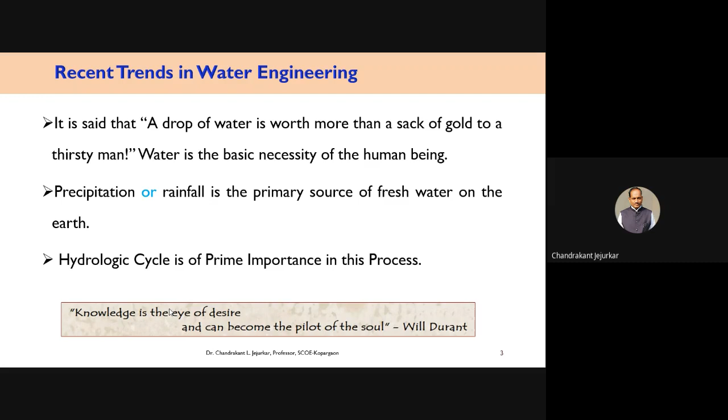Here I have shown one quote: knowledge is the eye of desire and can become the pilot of the soul, stated by Will Durant. I intentionally quoted this because whenever delegates attend this type of FDPs or STTPs, their thirst is to search for a problem for their research work. So knowledge is the eye of desire—if you have the knowledge, you will have the desire to become the pilot of the soul, meaning things may click to you, so that you get a problem statement or a research problem to work on.

Now coming to the concept of infiltration. Infiltration is the process of water entry from surface sources such as rainfall, snow melt, or irrigation into the soil surface. It is the downward movement of water into the earth's crust.

And definitely it starts from the hydrologic cycle. In most lecture sessions, touch is given to the hydrologic cycle because it is the major source of water, due to which there will be precipitation. So here also I will be talking about hydrologic cycle. In the first session itself, Dr. Dai has explained regarding this hydrologic cycle, and even touched briefly on infiltration. Till then, I would like to talk about this hydrologic cycle.

So here, the hydrologic cycle always begins from the oceans or surfaces of various types of ponds or reservoirs, or collection tanks. There will be evaporation, transpiration from trees, and it will go higher and higher. There will be condensation, formation of clouds, and after bursting of the cloud, there will be precipitation.

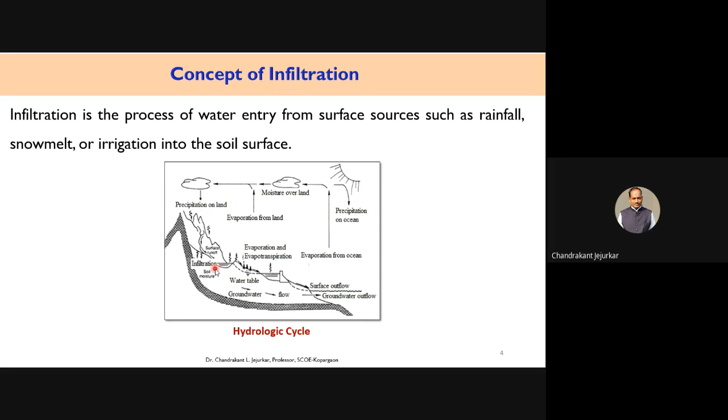Some of the part will become base flow also, and again this cycle will get continued. So in this presentation, we'll be talking about infiltration in detail.

So this is the flow diagram of the catchment already discussed. Along with the hydrologic cycle, precipitation will be there. After this precipitation, there will be interception, then stream flow, surface storage will be there. Out of this surface storage, some part will become soil water storage. It may go to vegetation, transpiration may occur, and then from this surface storage, there will be infiltration.

Afterward, there will be surface flow, then soil water storage, and due to this soil water storage, there is development of through flow. When it reaches a greater depth, it is called percolation. So infiltration occurs within the crust of the earth, and when it shifts to a greater depth, when it becomes part of groundwater storage, it is called percolation.

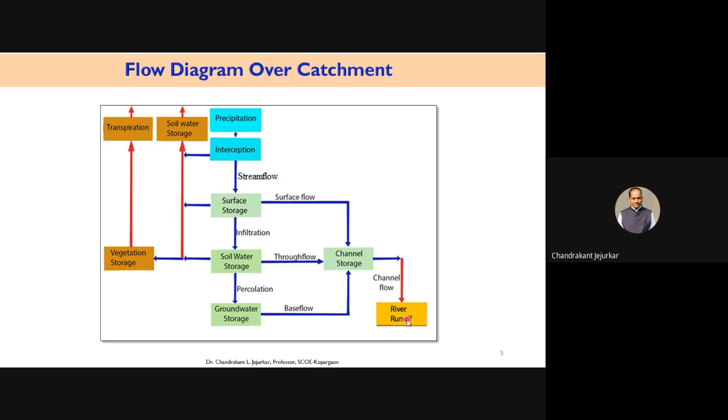Out of this groundwater, sometimes the base flow may intercept the ground surface at any place, and again it will become part of runoff, in turn river runoff.

Now, this infiltration concept was first developed by Robert E. Horton, an American geologist. While studying, or observing the soaking of water into the soil, he put forth the concept of infiltration first in 1933.

So already I had discussed regarding this percolation. Now, necessity of infiltration study - why study infiltration at all? Soil can be an exceptional medium of temporary storage of water depending on the soil type and its condition. The infiltration characteristics play an important role in the planning, designing and management of various hydraulic projects.

Infiltration study may help for watershed management. It is also useful for soil erosion control, for proper irrigation planning. Runoff prediction plays a vital role in water resources projects, and the accurate estimation of runoff is related with infiltration. So infiltration is very important.

So at a glance, it seems to be a very small thing, but infiltration has appealed to many hydrologists, and nowadays many hydrologists are working on this infiltration in one way or another. This infiltration is the cause for temporary storage of water into the earth.

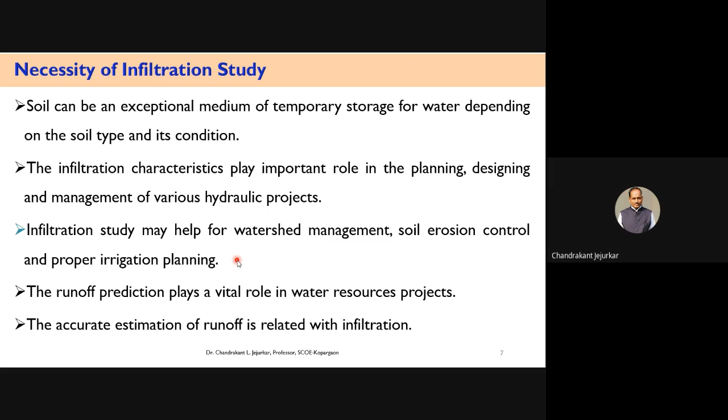So from this hydrology point of view, the study of infiltration, in turn runoff, is very important. It is also useful in watershed management, as rightly explained by Dr. Dai while discussing water hydrology. It is useful for erosion study as well as irrigation planning, because from infiltration one gets an idea regarding the depth of irrigation, so we can plan the irrigation scheduling also. That's why we have to study this infiltration.

Moving forward, objectives of the study: to evaluate the infiltration capacity of soil and reliability of infiltration test using double ring infiltrometer. Friends, for your kind information, since the last decade I am working on this infiltration, and till date I have observed more than 500 observations in the field.

I am not using anyone's data, my data is self-generated. So here I am stating the objectives, considering today's presentation: to evaluate the infiltration capacity of the soil and reliability of infiltration test using double ring infiltrometer; to study the validity of Kostiakov and modified Kostiakov infiltration models under existing land cover conditions; to evaluate the infiltration model parameters of Kostiakov and modified Kostiakov using field data; to employ artificial neural network to determine Kostiakov model parameters; and to compare field measured cumulative infiltration with model estimated and ANN predicted values.

So if you look into these objectives of the study, my first objective is to evaluate the infiltration test in the field. I have to carry out the field test, and then from this test determine the Kostiakov and modified Kostiakov infiltration model parameters, evaluate the infiltration model parameters, and employ artificial neural network. So the work is carried out in 3 stages. Two technical terms I would like to explain here.

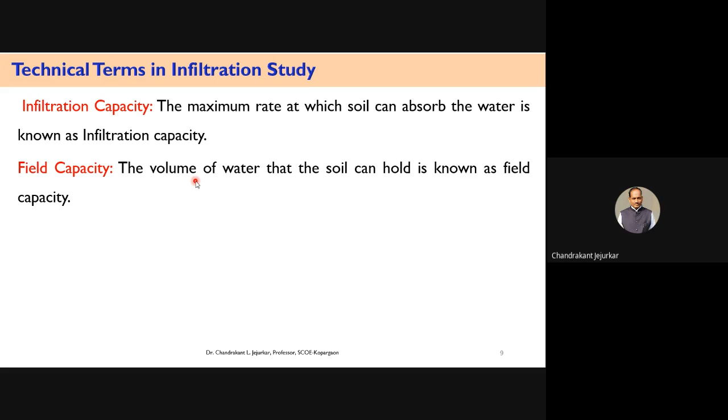Infiltration capacity: the maximum rate at which soil can absorb water is known as infiltration capacity. Field capacity: the volume of water that the soil can hold is known as field capacity. So infiltration capacity is the rate by which water is absorbed by the soil, and it is the maximum rate. Field capacity is how much water the soil can hold. So field capacity is related to volume, and infiltration capacity is related to rate.

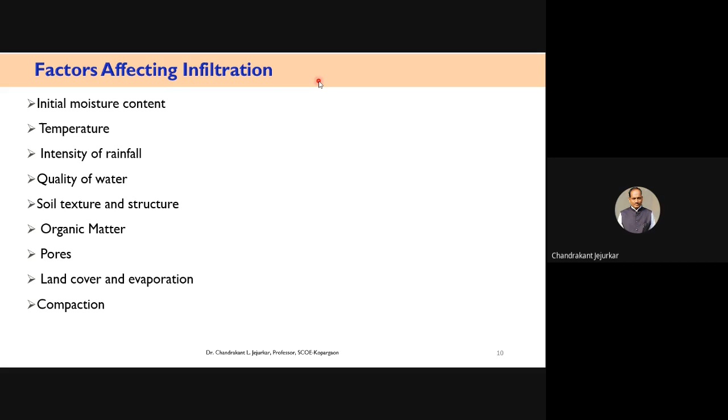Moving forward, factors affecting infiltration. While studying infiltration, one should know the various factors which may affect it, so we can come to an accurate estimation of infiltration, and in turn runoff. Unless we correlate all these parameters, we cannot have an accurate estimation. The first factors are initial moisture content, temperature, intensity of rainfall, quality of water, soil texture and structure, organic matter, pores, land cover, and compaction. These are a few parameters stated here; I shall explain a few of them.

Initial moisture content: the initial rate of infiltration depends on the initial moisture condition of the soil. When soil moisture is high, infiltration rate is low, and when soil moisture is low, infiltration rate is high. So if soil is holding sufficient moisture initially, the thirst will be less, so infiltration rate will be slow. And if soil moisture is low, infiltration rate will be high.

Temperature: viscosity of water changes with temperature. Increase in temperature causes reduction in viscosity, so infiltration is higher when temperature is high. It is directly proportional - if temperature is high, infiltration rate will be higher because the water absorption capacity of the soil will be more in that case.

Then coming to intensity of rainfall: high intensity rainfall causes mechanical compaction of soil, so heavy intensity rainfall causes less infiltration, while lesser intensity rainfall causes higher infiltration. This intensity of rainfall is also very, very important. So if we observe, when heavy precipitation occurs, there will be early development of runoff.

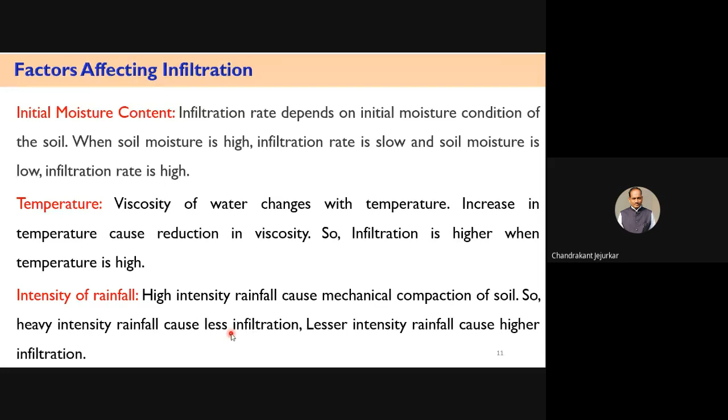Moving forward, quality of water. The quality of water is also very important. If the water is of good quality, potable and clean, infiltration rate will be more. If it is containing organic matter, silts and other impurities, it will reduce the infiltration rate. In case of muddy water also, infiltration rate will be less as it contains small colloidal particles, which reduce the infiltration rate.

Compaction also has a major effect on infiltration rate, as we are talking about the farm. In farming, there is movement of men and animals required in the field. Due to this movement, there will be compaction of the soil. If we try to determine the infiltration rate in that area, obviously the infiltration rate will be very, very less.

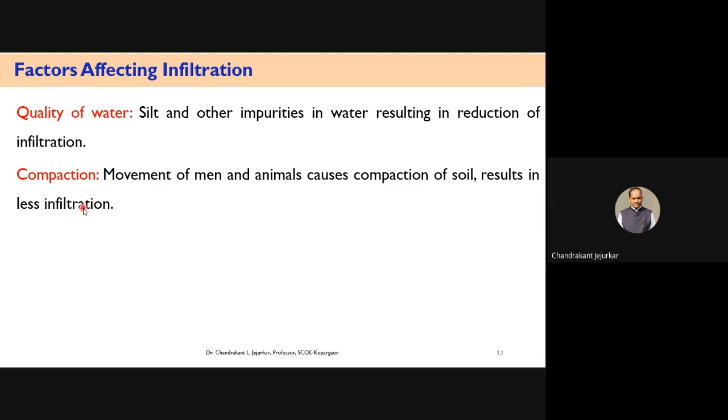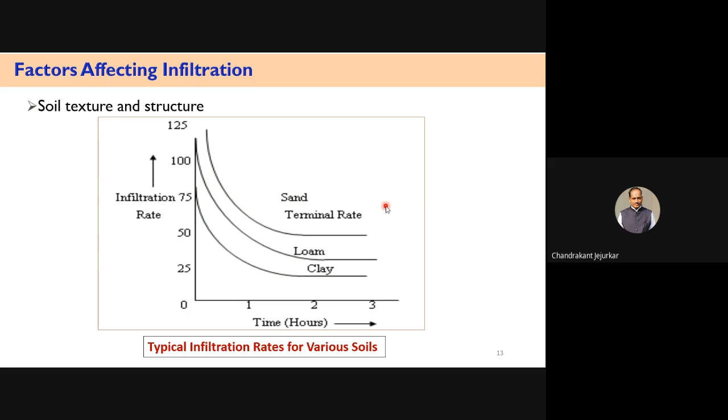Structure is also very important. In case of a square textured soil, infiltration rate will be more. In case of rhombic structure, particles will be more compacted, so infiltration rate will be less. Around round particles, more space will be there, higher porosity and more infiltration. In case of angular particles, there is less pore space, less porosity, and less infiltration.

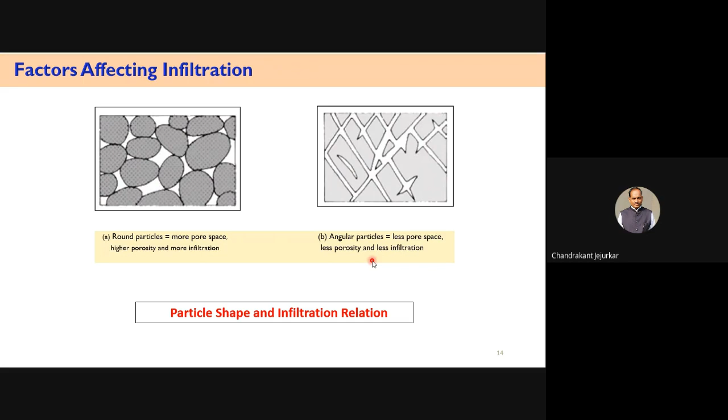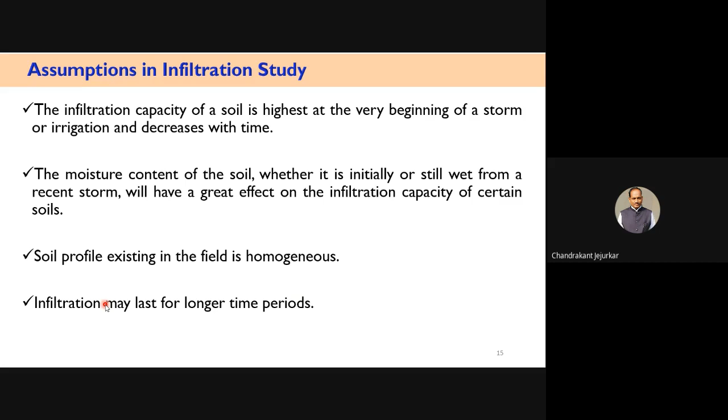In any research, assumptions are always there, and similarly there are some assumptions in infiltration study. The infiltration capacity of soil is highest at the very beginning of a storm or irrigation and decreases with time. The moisture content of the soil, whether initially dry or still wet from a recent storm, will have a great effect on the infiltration capacity of certain soils. The soil profile existing in the field is treated as homogeneous. Infiltration may last for longer time periods. This assumption is important, because within 2 to 3 hours we cannot get the result of infiltration, but during my observations it takes couple of hours to become constant, as we have to stop observations when infiltration rate becomes constant. How it becomes constant and where to stop, we shall discuss while discussing the observation table in detail.

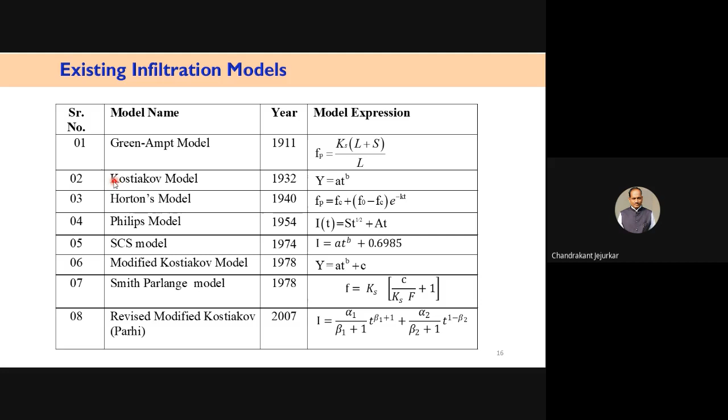Now, these are the existing infiltration models: first is Green-Ampt model, then Kostiakov model, Horton's model, Philip's model, SCS model, modified Kostiakov model, Smith-Parlange model, and revised modified Kostiakov model. Out of these models, I had worked on the Kostiakov model, the modified Kostiakov model, as well as the Horton model.

Coming to the study area, since last decade I am working in the Kopargaon region. This case study which I am presenting in today's presentation is related to the village Brahmangaon, which comes under Kopargaon Taluka.

In case of the study area, the temperature variation is 20 degrees centigrade to 40 degrees centigrade, minimum 20 degree, maximum 40 degrees centigrade, and average annual rainfall observed is about 480 mm, because it comes under a rain shadow zone, so this amount is not predominant.

Most of the part of Kopargaon is underlain by basalt. In this complete Ahmednagar district, basalt is predominant.

Soil in the investigation area is a clay soil. Locally this soil is called black cotton soil. In Maharashtra also, the clay soil is called black cotton soil. This is also called a deep soil.

In case of this Kopargaon region, the depth of this clay soil is 25 to 30 feet, around 25 feet. It is a deep soil.

As per Food and Agriculture Organization FAO and USDA taxonomy, this type of soil comes under vertisols.

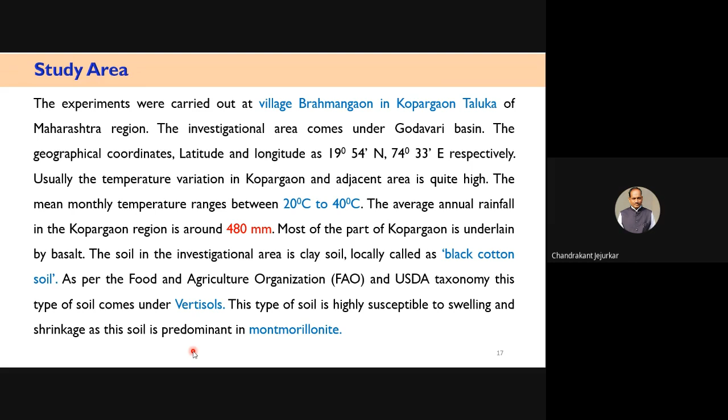This type of soil is highly susceptible to swelling and shrinkage as it is predominant in Montmorillonite. In case of this vertisol, the major difficulty is that when it dries, it shrinks a lot, and when it comes in contact with water, it becomes moist and swells. The reason is that it is predominant of Montmorillonite element.

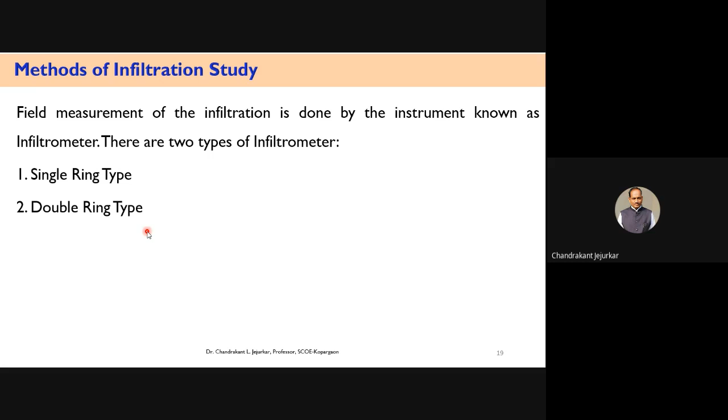Now, methods of infiltration study, how to determine the infiltration in the field. In the field, different techniques are there for determination of the infiltration rate. Mainly there are two types of infiltrometer: single ring infiltrometer and double ring infiltrometer, used for determination of infiltration in the field.

Coming to this single ring infiltrometer, as its name suggests, it consists of only one ring, called a single ring. The diameter of this single ring is 30 centimeter and depth is 25 centimeter. This is used for determination of infiltration in the field.

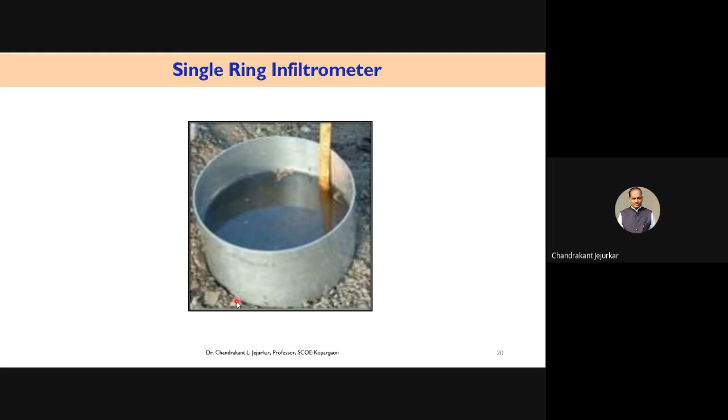How it is determined, we shall discuss while discussing the double ring infiltrometer. The difficulty with the single ring is that normally it is not used for determination of infiltration in the field, because there is a possibility of lateral flow, lateral movement of water. As per our definition, infiltration is the downward movement of water, so in case of the single ring there is a possibility of lateral movement also. So for accurate estimation of infiltration, single ring infiltrometer is not preferred.

Now coming to the double ring infiltrometer. It consists of two concentric rings, this is the inner ring and this is the outer ring. Most of the time this double ring infiltrometer is used for determination of infiltration in the field. The inner diameter of the inner ring is 30 centimeter, depth is 25 centimeter. The diameter of the outer ring is 60 centimeter and depth is 25 centimeter.

For determination of the infiltration in the field, these rings are installed in the field. How does this process work?

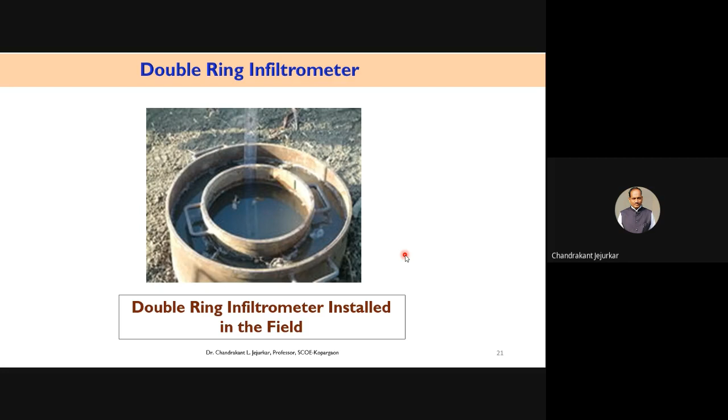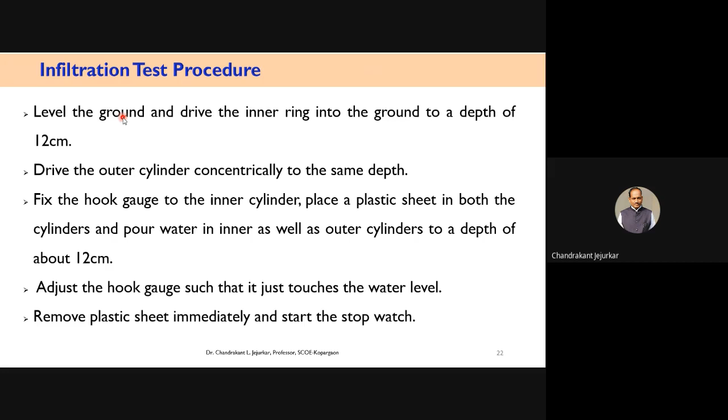Infiltration test procedure: first, level the ground and drive the inner ring into the ground to a depth of 12 centimeter. Leveling the ground means you should not use any tool that disturbs the natural condition or natural structure of the soil, so roughly with the hand, without any type of tools, one has to level the ground, and then insert this inner ring.

When I initially worked on this infiltration, before 10 years ago, I had fabricated this infiltrometer for my infiltration purpose, and recently I have purchased this double ring infiltrometer for my future study. Presently, I am working on this double ring infiltrometer.

First the ground is made approximately level, and then the inner ring is inserted into the ground with the help of a driving plate. This type of plate is used to drive the inner ring into the ground. First, the inner ring is properly placed where one has to take the observation, and then it is inserted into the ground to a depth of 10 to 12 centimeter with the help of the driving plate and hammer.

Driving plate will be kept here, and then it is hammered so that it gets inserted to a depth of 10 to 12 centimeters. Then the second ring, concentrically it is kept, this outer ring, and then with the help of this driving plate and hammer, it is inserted to the same level as the inner ring, driven concentrically to the same depth.

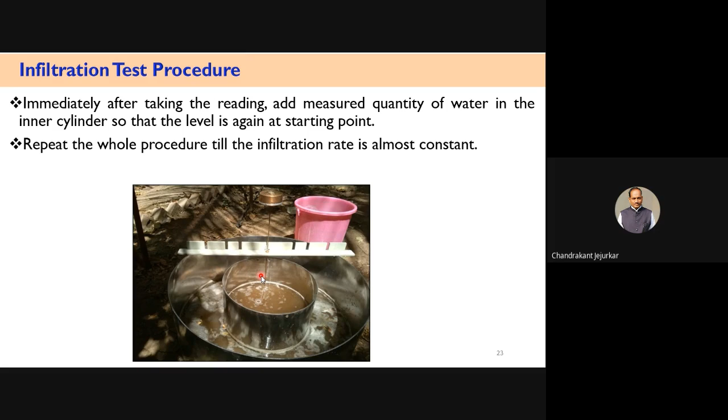When papers are removed, initially the water surface, this point is touching the water surface, then water will start penetrating. The time is recorded, observations are recorded as the gauge is adjusted. Then immediately after taking the reading, add a measured, sufficient quantity of water. It is measured and added so that the next level will again equal the initial level, meaning this pointer is touching the water surface. Now this complete process is repeated until the infiltration rate becomes constant, right?

Now, for my study till date, I have used the Kostiakov model, modified Kostiakov. I have also worked on the Horton model in my PG project itself.

So the expression for this Kostiakov model is y equals, or sometimes y suffix c is used, y suffix c equals a into t to the power b. Here a and b are the model parameters, and these are the soil constants related to the soil.

Modified Kostiakov: y equals a t to the power b plus c, and here a, b and c are the constants, soil constants. C is normally called the decay constant.

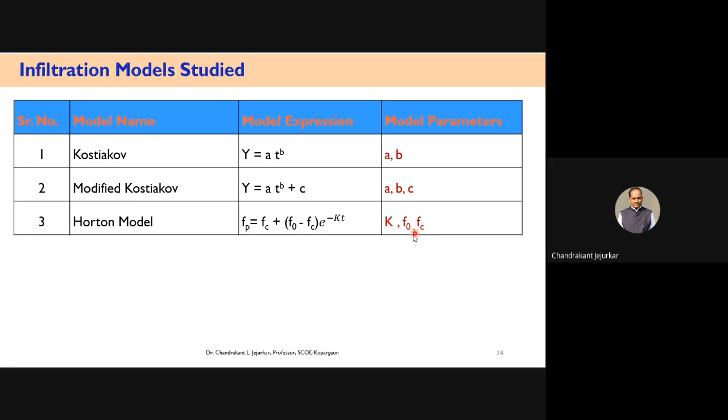In case of the Horton model, the expression is given as f suffix p equals f suffix c plus, in bracket, f0 minus f suffix c, close bracket, complete e to the power minus kt. Here K, F0, Fc are the constants which are required to be determined from the field data.

Coming to this Kostiakov infiltration model, the basic expression is given as y suffix c equals a into t to the power b. Here Yc is the cumulative infiltration, or you can say accumulated infiltration, always in terms of centimeter. T is the time in minutes, and A and B are the parameters.

For determination of A and B from the field data, different methods are used, analytical methods and graphical methods. For determination of these parameters A and B, I have mainly used the analytical method. If anybody is interested, there is a practical manual available in the WALMI, where the complete procedure is explained in detail for determination of these constants A and B.

This A and B can be determined by forming the equations. For that purpose, we have to convert this expression in terms of log y equals log A plus B log T, and then whatever observations we have got from the field for Yc and T are substituted here. Then we have to divide the equations into 50% groups, form two equations, and obtain A and B from the field data.

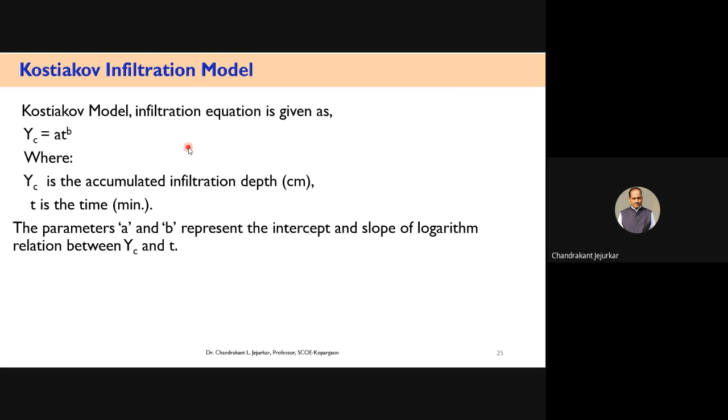Similarly, in case of the modified Kostiakov model, the equation is Yc equals A t to the power b plus c. Here A and B are determined similar to the Kostiakov model, and c is the soil decay constant, normally determined by the Davis method, which is also explained in that manual. If you are interested, you can get that manual and very easily determine it.

But for that purpose, we have to collect the field data. For determination of C, we have to plot log y versus T, and then select any two times T1, T2 and corresponding Yc values Y1, Y2, and then the constant can be determined.

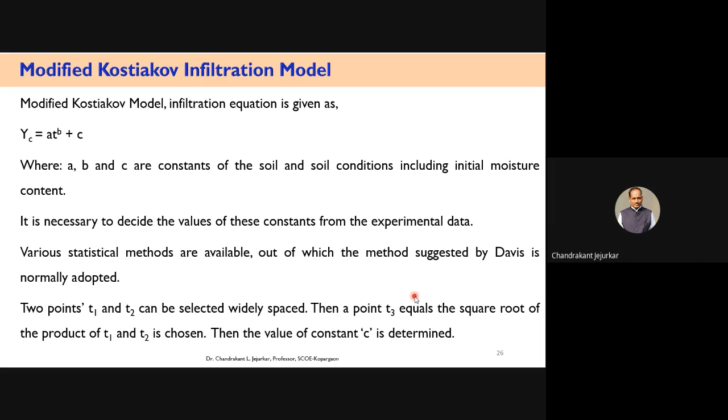So T3 is equal to the square root of T1 into T2, and then Y3 will correspond to this T3, and then we can determine this C. One more expression is there for determination of this C also.

While determining infiltration for accurate estimation, if you determine the infiltration in the field, you will get accurate estimation. But in addition, we should study various physical properties of the soil which may directly or indirectly affect the infiltration. So in this case study, I have studied moisture content, bulk density and dry density, mainly bulk density of the soil, particle size distribution, electrical conductivity, field capacity and permanent wilting point. These parameters I have studied in the field.

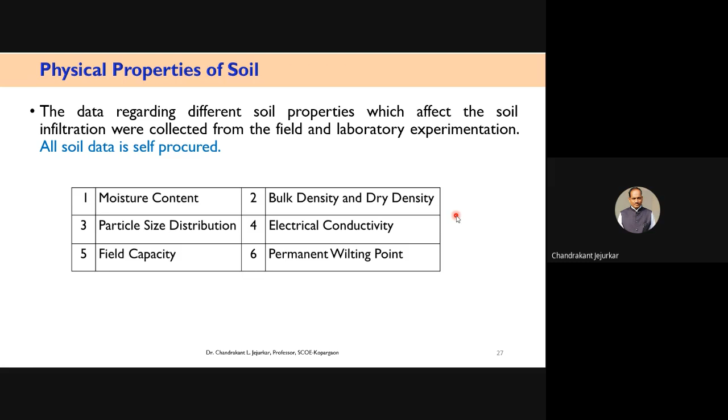So prior to starting the infiltration, we have to study these soil parameters, that is moisture content. We have to study bulk density also, because bulk density dictates the compaction of soil. Bulk density depends upon the compaction of the soil.

Pore spaces provide a more useful physical description of the soil, and soil bulk density is a measure of soil compaction as well as its strength. From this, we get an idea regarding the deviation in the infiltration. If it is less, if it is more, we have to study why it is there, or we can analyze it with the help of this bulk density of the soil.

Then particle size distribution, that is determined by the hydrometer method using Stokes' law, which is the basis for it.

Then electrical conductivity. This electrical conductivity tester I purchased at that time for testing electrical conductivity. This soil electrical conductivity is an indirect measurement that correlates very well with several soil properties and chemical properties. This electrical conductivity works on the cations and anions, and this is very, very important.

Electrical conductivity has been used to assess soil salinity. In case of finer particle soil, in case of clay soil, the electrical conductivity is high, and in case of sandy soil, the electrical conductivity is less. So this electrical conductivity obviously dictates upon the infiltration.

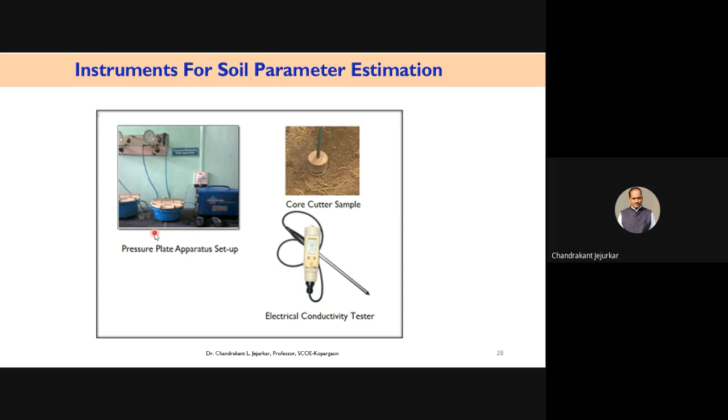The difference between field capacity and wilting point gives the depth of water to be applied. Field capacity is the upper limit, showing the upper limit of water in the soil after free drainage for 2 to 3 days, and wilting point is the lower limit. So the difference of these two gives an idea regarding the depth, which is useful for irrigation purpose, or to decide the irrigation scheduling also.

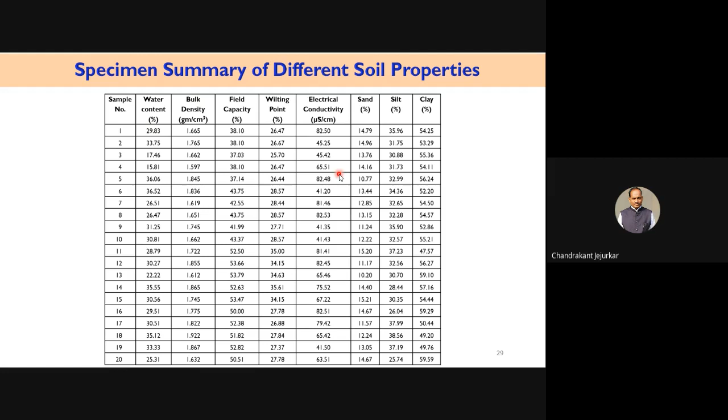As part of this case study, I had used 120 observations. Out of these 120 observations, some observations are outliers, meaning they don't give proper results. Those are removed, so 106 parameter details I have collected, and as a part of specimen, here only 20 observations are shown. Here you can see water content, bulk density, field capacity, wilting point, electrical conductivity, and then percentage of sand, silt, and clay.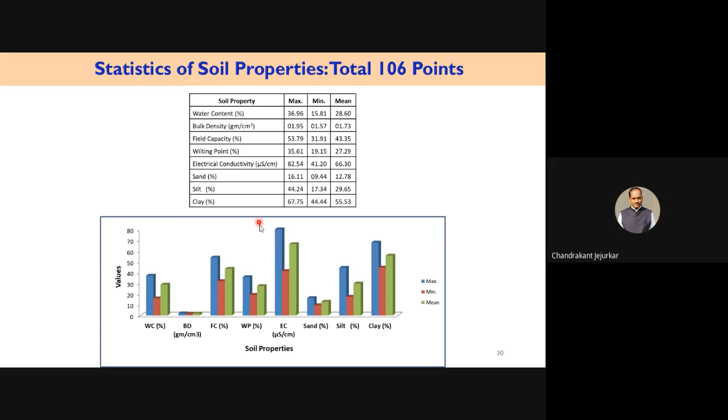Now coming to statistics of the soil parameters, already I have told you 106 point observations are there, total 106 points. Here you can see the maximum, minimum, and average values of all these parameters. These are also shown graphically.

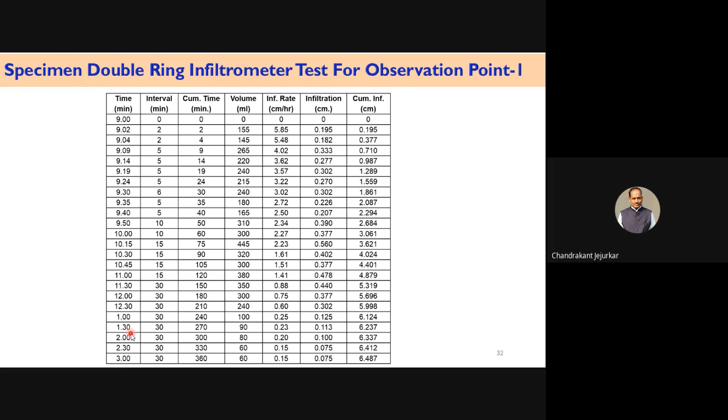At the same time, if continuous pores are there, sometimes even after 10 to 12 hours, we won't get the constant infiltration rate. In that case, the test will get failed, because we cannot continue for 24 hours also. So this is regarding the observation table.

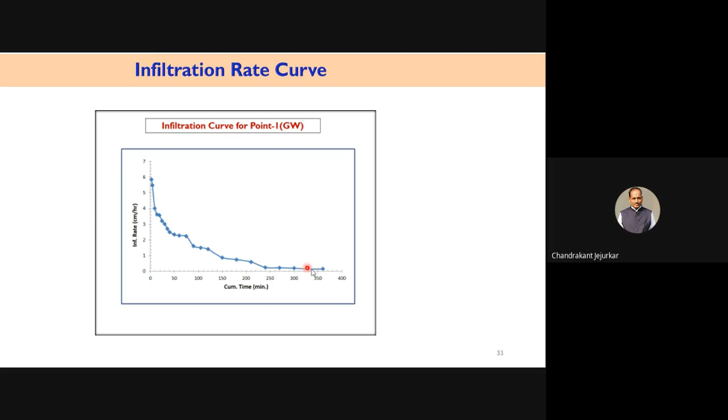Now with the help of the same observation table, here is the outcome. This is the plot of infiltration rate versus time, where infiltration rate is determined in centimeter per hour and time in minutes. Initially the infiltration rate is very high, afterwards it becomes less and less, and at the end it becomes constant. This is the nature of the infiltration rate curve.

So here again I had shown these two plots. This type of plot is similar to the previous one. This is the infiltration curve for point number 5, which is the Bajra crop, and this is the infiltration curve for point number 6, which is also a Bajra crop.

Here you can see initially the infiltration rate is high, then it is reducing and reducing. Afterwards it becomes constant, and this constant rate is also more than 5 centimeter per hour. So this is also high in case of Bajra crop.

Now for the same land cover, here you can see the infiltration rate becoming low and low. Again there is an increase, again afterwards it is decreasing, again increasing and then decreasing. Sometimes in the field this type of situation may arise due to continuous pores, bigger pores, or bigger voids. In that case the infiltration rate will suddenly become high, and this type of formation will be there.

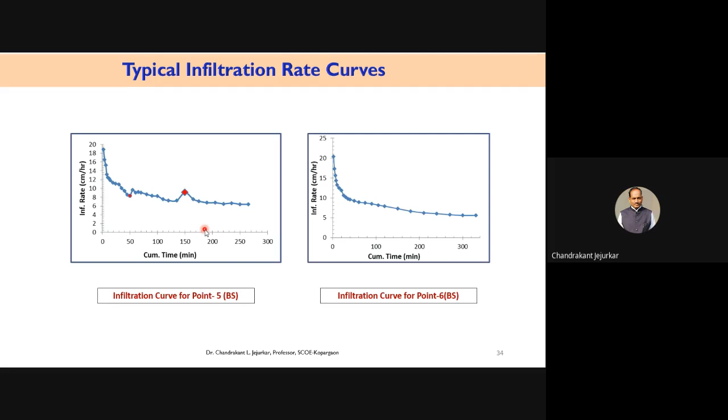Technically this is called neck formation. You will find this type of neck formation during observations also. In that case one should not get disturbed or disappointed about what is happening. No, it is the nature of it. Still we have to continue the observations in the field. If this type of situation is there, sometimes it becomes very difficult to adjust the amount of water also. These are field problems sometimes.

Coming to average cumulative infiltration depth, the total amount of water infiltrated, again for grapes in summer it is 4.35, which is the lowest. For the rest of the crops and land covers it is more. Here if you observe for sugarcane, normally we say that a large amount of water is required, and the same has been proved practically. The cumulative depth of infiltration is around 46 centimeter in case of sugarcane, and nearer to this, gram is there, and then bajra. For gram and bajra also, the cumulative depths are more.

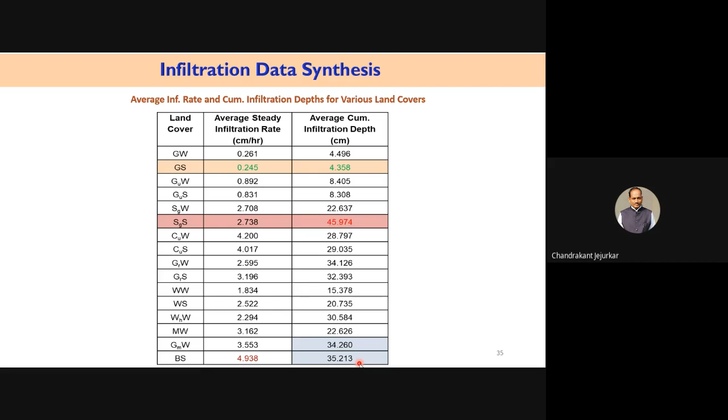There is a reason. Now you may think that normally for gram less amount of water is required. Yes, for bajra also less amount of water is required. Normally in case of gram, those belonging to farmer families might be aware that a maximum of 2 waterings are given, or sometimes only 1 watering is given to the crop. In case of bajra also, 2 to 3 waterings are given. So when we try to determine the infiltration rate in case of gram, as the soil will be very dry, and in case of black cotton soil there will be contraction of the soils and development of cracks, due to this the infiltration rate will also be more, and cumulative infiltration depth will be more. That is the reason.

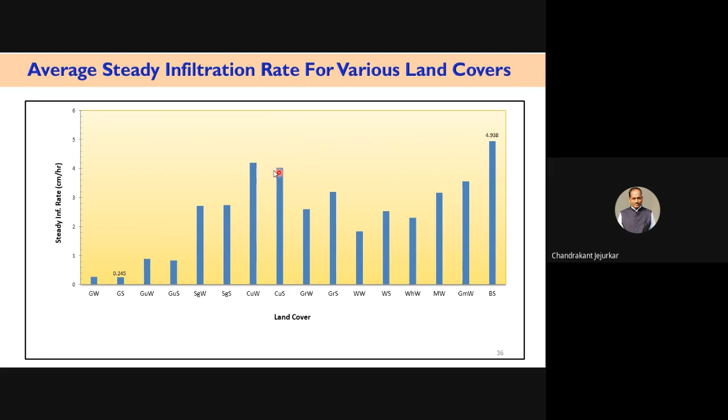So graphically the same thing is shown. This is the lowest value for steady infiltration rate, and this is the highest value for steady infiltration rate. This is predominant with the help of the graph, that's why I have shown it graphically also. Coming to cumulative infiltration depths, in case of sugarcane it is the highest. For gram as well as bajra, it is also high.

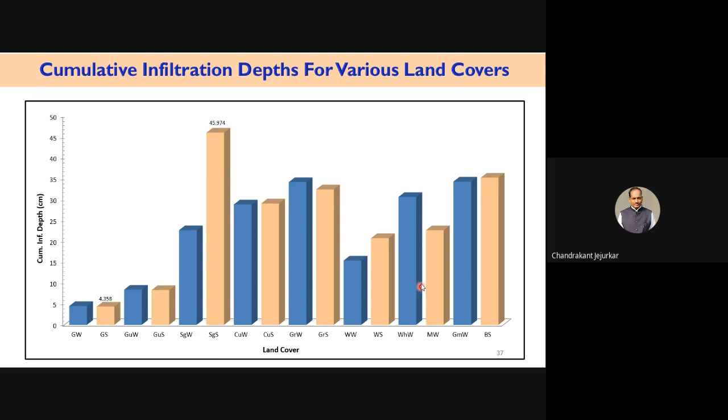Then computation of model constant. After observing the infiltration rate in the field, after determination of steady infiltration rate, after determination of cumulative depth of infiltration, I have determined Kostiakov model constants as well as modified Kostiakov model constants for various crop covers. For a same soil, but as crop covers are different, there will be different constants and different equations. This type of equations one can develop from the field observed data.

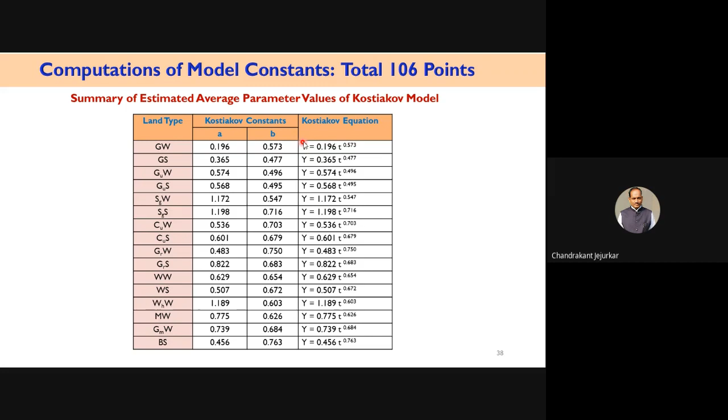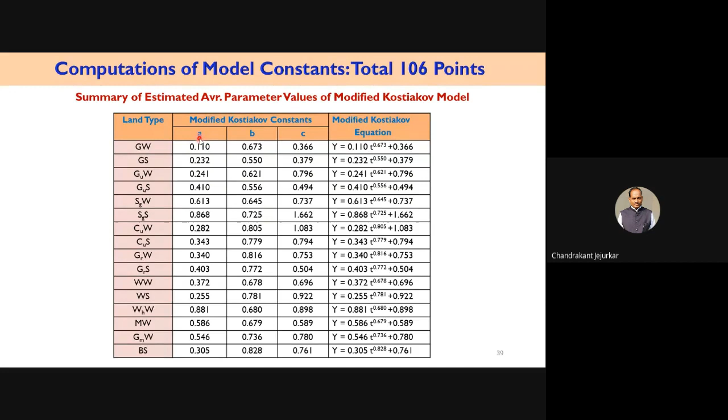And then we can find out the cumulative infiltration as well as infiltration rate by substituting the time. At any time interval, we can have infiltration rate and cumulative infiltration with the help of such an infiltration equation. This is the observation table for modified Kostiakov constant. A, B, and C already determined, and these are the equations for different types of land covers.

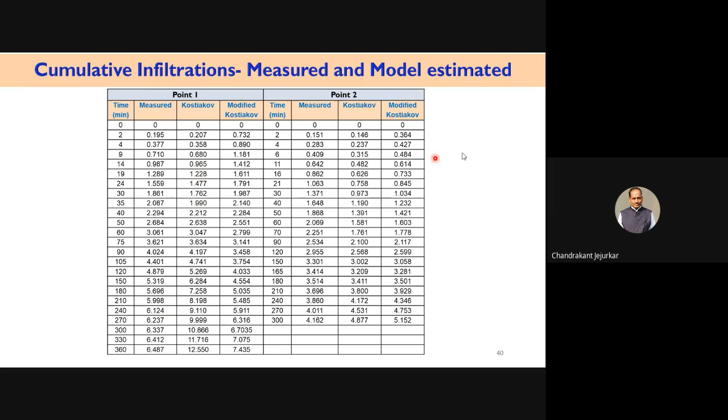Then here, cumulative infiltration measured and model estimated comparison is shown for observation point number 1 and point number 2. So for two observations, that is sample, it is shown here. So if we look into this measured value, then this is by Kostiakov model and this is by modified Kostiakov. These are the cumulative infiltration values. Same thing I have plotted with the help of a graph also.

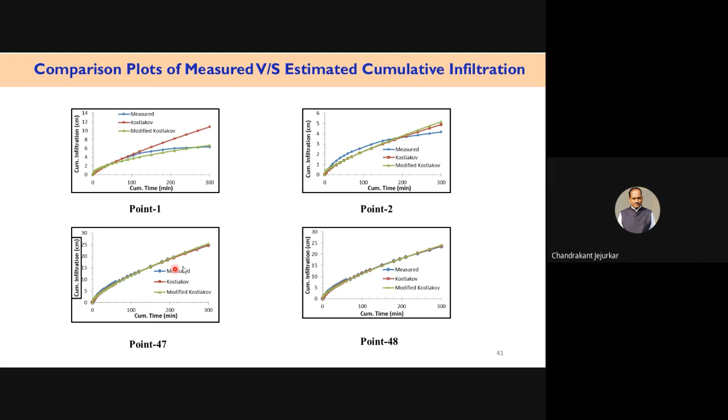Now coming to conclusions, I would like to state the conclusions of these field observed data and modified Kostiakov and Kostiakov estimated results. Accurate estimation of infiltration is a key input in watershed management. It plays a very important role in planning and design of various water resources projects, including design of dams. In addition, soil infiltration characteristics are helpful for runoff estimation and irrigation management.

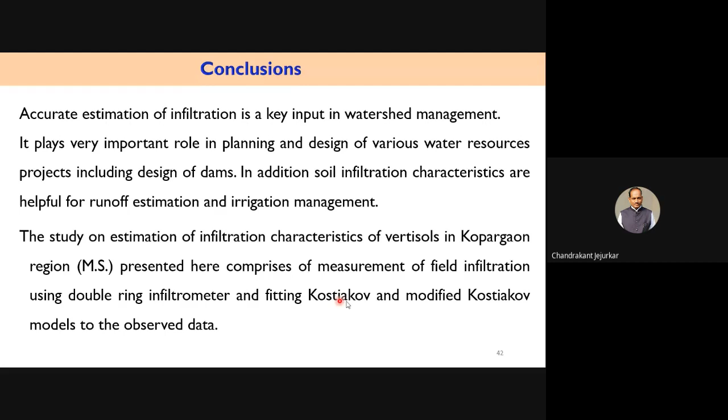The study on estimation of infiltration characteristics of vertisol, that is the clay soil in Kopargaon region, presented here, comprises measurement of field infiltration using double ring infiltrometer and fitting Kostiakov and modified Kostiakov models to the observed data. The specific conclusions based on results and discussions are summarized below.

As shown graphically and with the help of tables, the basic infiltration rate varies from 0.15 to 6.40 centimeter per hour. The average steady infiltration rate was observed minimum 0.245 for land with grapes garden, and maximum 4.94 for bajra cover. The cumulative infiltration depth was 4.36 centimeter for land with grape cover, and maximum cumulative depth was observed as 45.97 centimeter on land with sugarcane.

These are the conclusions of this study. The trends of absolute mean difference between field observed and model estimated cumulative infiltration depth suggests that the Kostiakov and modified Kostiakov models have closer agreement with the field measured data. In turn, we can say that both the models can be used for prediction of infiltration rate in the study area, because the results are matching with the field data properly, there is a proper correlation between them. So this Kostiakov model and modified Kostiakov model, as they have closer agreement, can be used for prediction of the infiltration data.

So this is the first part. Now moving forward, next part is I have applied artificial neural network to the same study.

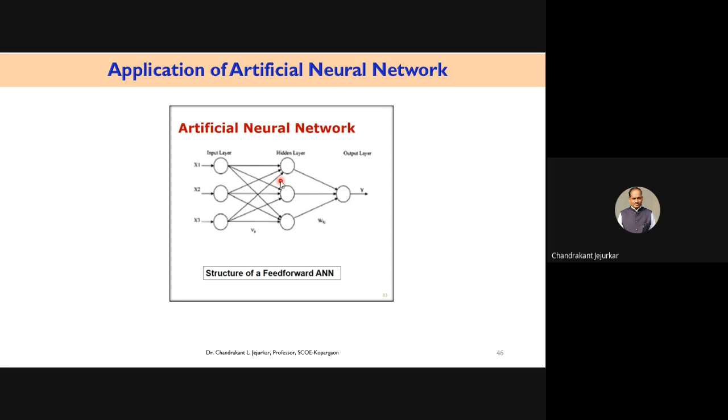Normally for water resources studies, various types of hydrology studies, this feed-forward back propagation network is used, and the same network I have applied for my study. I will not go into detail of this.

As a part of this study, for the same observations we discussed regarding field observation as well as modified Kostiakov and Kostiakov models, I have applied this ANN only for the Kostiakov model. As a part of this, these are the three networks, the designed and created networks, which I have proposed for my study.

For ANN2 model, 6 inputs are considered: moisture content, bulk density, field capacity, electrical conductivity, sand percent, and clay percent. For ANN3, all 8 inputs are considered and given weightage.

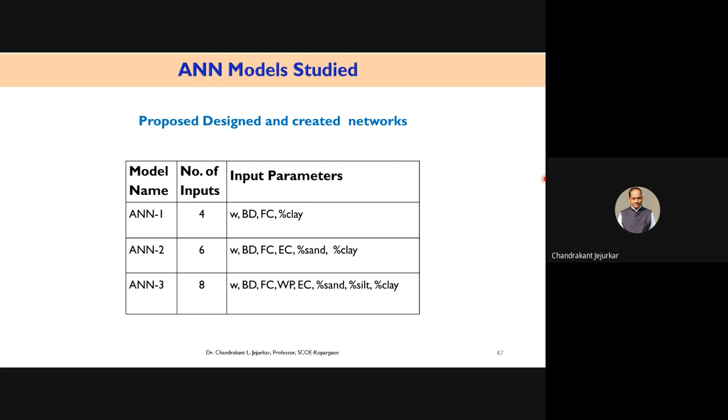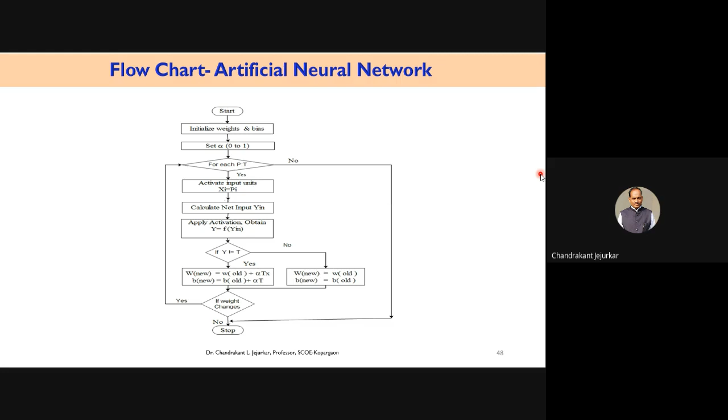And this is the flow chart for my study. For this ANN model, I have used MATLAB, and there I have prepared and written a program. This flow chart gives highlights of the sequential flow of network training, how I carried out the work.

Now, directly coming to the output, model estimated and ANN simulated parameters. Here training is given. In total, 106 observations are used, and for training purpose normally 70% of the data is used, while 30% of the data is used for testing or validation purpose. The same concept I have used here, as Magar sir also stated: 70% of the data for training, 30% for testing.

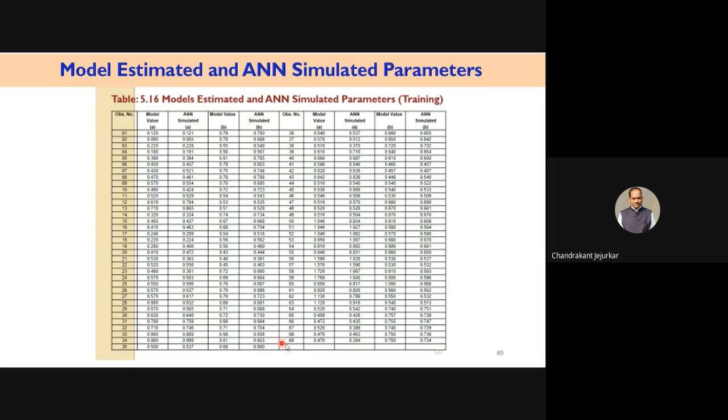So here you can see the model estimated and ANN simulated parameters. These parameters are shown: model value for parameter A and the ANN simulated value for A. I think it's not clearly visible, so graphically also I will show you. Then this is parameter B simulated by ANN, since A and B parameters are considered as I am using only the Kostiakov model. So this is parameter A estimated by the Kostiakov model and simulated by the ANN model, and this is again parameter B from the Kostiakov model and ANN simulated, for a total of 69 observations.

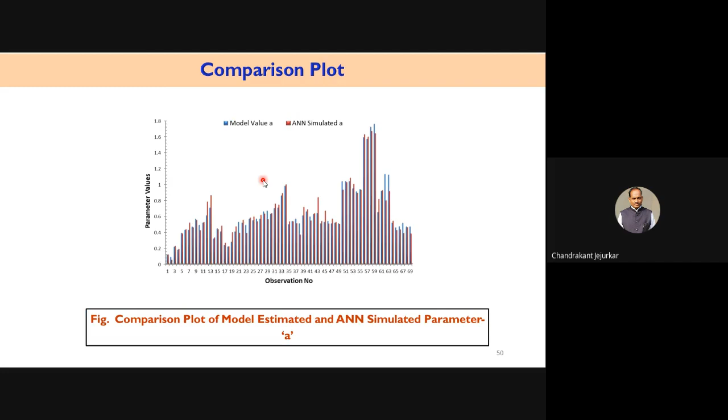Now you can see this comparative plot of model estimated value A and ANN simulated value. Very easily you can see here whether these are matching or if there is a little deviation. Almost these are matching, the values are nearly the same with a little deviation. In case of parameter B, the results are closer compared to parameter A, and these plots I have plotted in Excel.

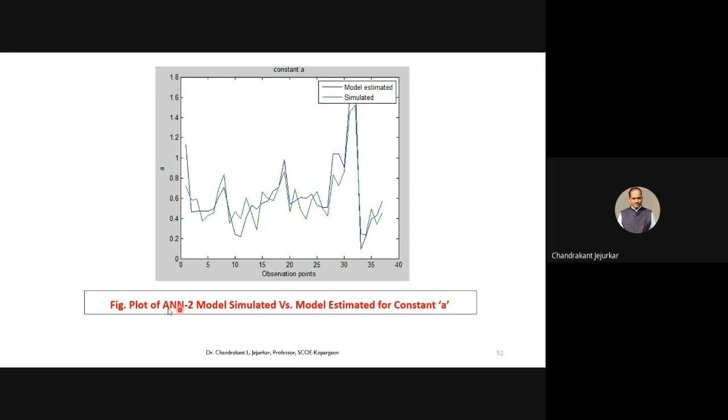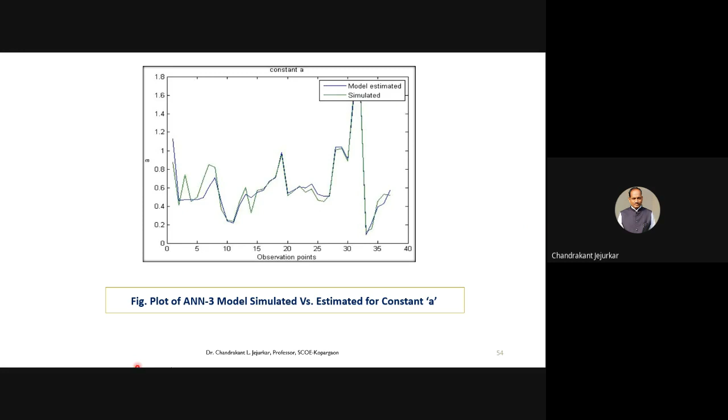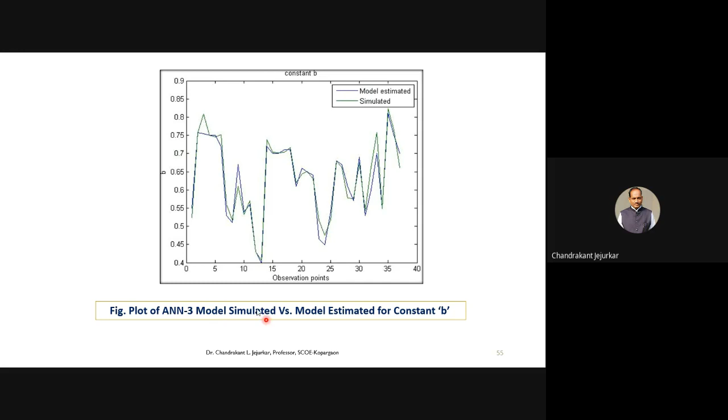Coming to the ANN3 model, if you see here, the model estimated and ANN predicted values are matching, showing good correlation. This is the plot from ANN itself, the ANN3 model. Similarly, for parameter B, there is very less variation. So one can conclude that the ANN3 model gives good results.

Here, ANN performance assessment for all three models is shown. These are the model parameters A and B for all three models, and these are the assessment parameters used to assess the results: root mean square error, mean absolute error, R square, and Nash-Sutcliffe efficiency.

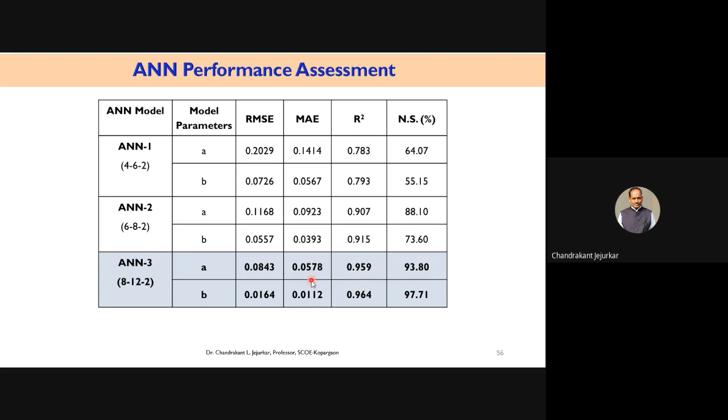If you look into these results, the values of R square and Nash-Sutcliffe are not appropriate as such in case of ANN1. In case of ANN2, a little bit okay. But in case of the ANN3 model, the results are much better. I shall explain this in more detail in the conclusion.

So, comparison of cumulative infiltrations. Here for two sample points, point number 3 and point number 4, I have shown the results estimated with the help of the Kostiakov model. This is the field measured value, this is estimated with the Kostiakov model, and this is the ANN simulated value for these two points.

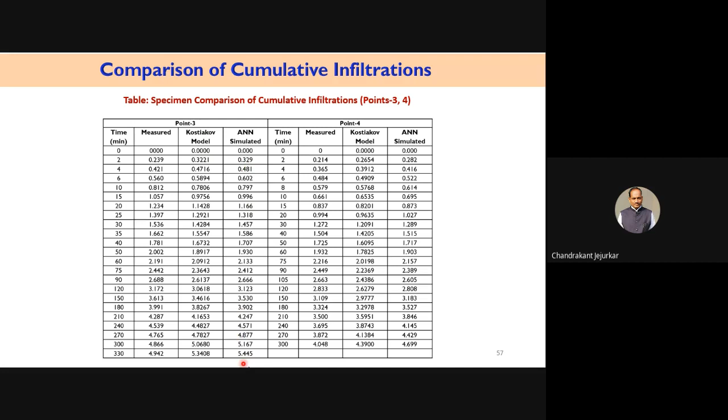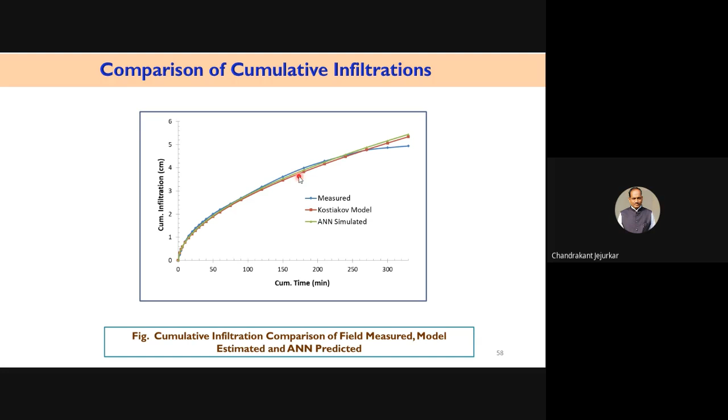Graphically also it is shown. Here the blue color shows measured, the reddish brown shows the Kostiakov model, and the green shows ANN simulated. You can see the measured, Kostiakov model estimated, and ANN simulated values are showing good correlation, almost matching. Here also all are matching, giving very close results.

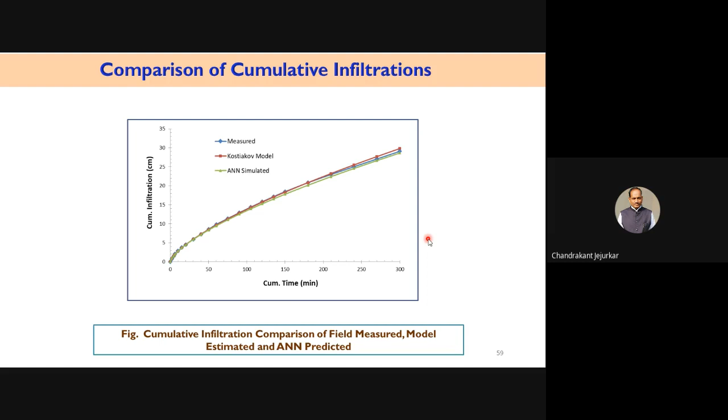So coming to the conclusion, in the second part of the study, the feed forward back propagation ANN was employed for estimation of Kostiakov infiltration model parameters. Only Kostiakov model parameters A and B were covered for the clay soil. Three different ANN models were developed based on various input combinations, named ANN1, ANN2, and ANN3.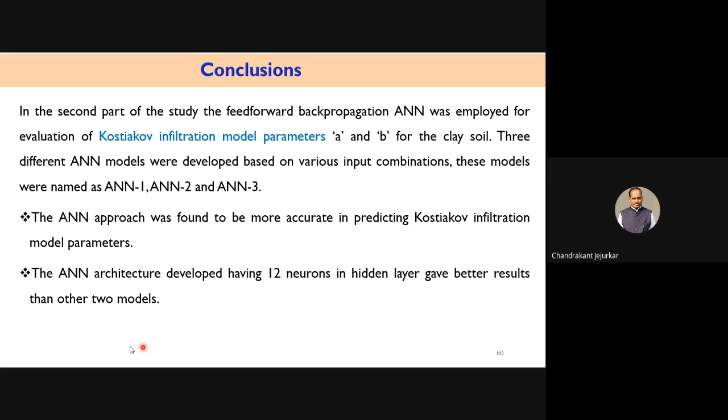The artificial neural network approach was found to be more accurate in predicting the Kostiakov infiltration model parameters. The ANN architecture developed, having 12 neurons in the hidden layer, gave better results than the other two models - that is the ANN3 model, with 8 inputs, 12 hidden neurons, and 2 outcomes. Here inputs are all the soil parameters, and outputs are these 2 constants.

With the help of this ANN3 model, the R square value is closer to unity, showing high accordance between estimated and ANN simulated values - a very good relation between them. Similarly, the mean absolute error and root mean square error, which are indicative of the error index, are very small, approaching zero, meaning a very good result.

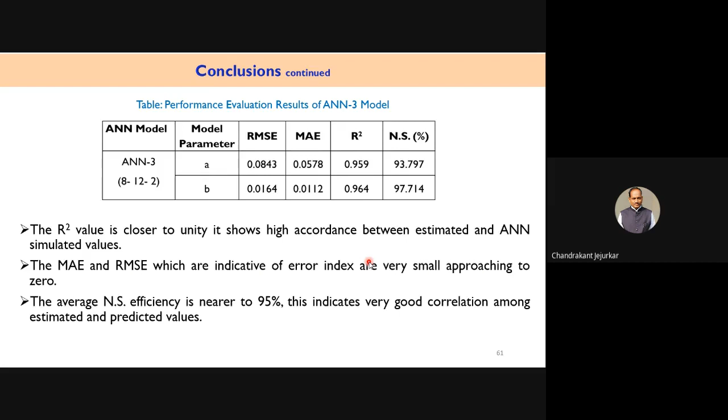The average Nash-Sutcliffe efficiency is nearer to 95%. If you take the average, it is more than 95%, indicating very good correlation among estimated and predicted values. The trained ANN model was able to satisfactorily predict the required model parameters.

The present study demonstrated the application of the ANN approach for prediction of infiltration model parameters and evaluation of infiltration characteristics of clay soil. Hence, the use of soil properties as input is important. The use of soil properties as input to the ANN to get the Kostiakov model parameters is recognized successfully. The Kostiakov model can subsequently be employed to get the cumulative infiltration or instantaneous infiltration at any time interval. Thus, the research presents an alternative approach for determination of infiltration characteristics, which happens to be a cumbersome and time-consuming exercise.

So we won't have to go for any other extensive work. If we have soil properties for the particular area, by substituting those soil properties, one can get the results.

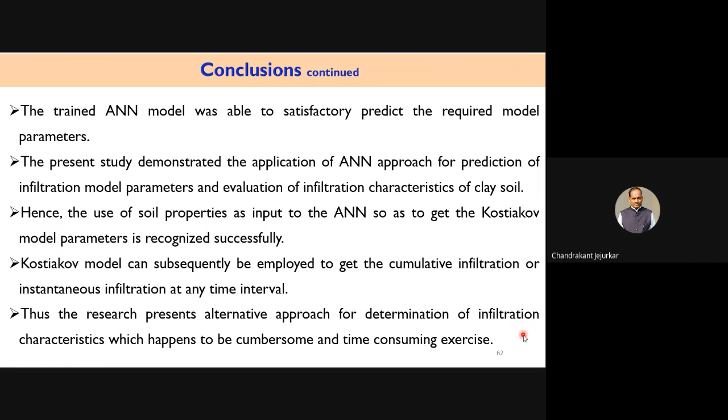So in turn, you can say ANN can be successfully applied for determination of infiltration rate as far as the Kostiakov model is concerned, because I also want to work on the modified Kostiakov model. Now, this is all about my case study which I have carried out on infiltration.

Since long back I have also been working on a rainfall simulator. I have fabricated a rainfall simulator with the help of drippers. But since these drippers affect the flow, I have now stopped working on this version of the rainfall simulator.

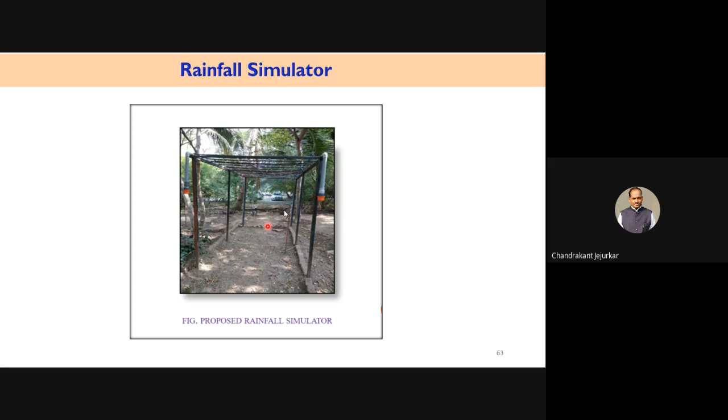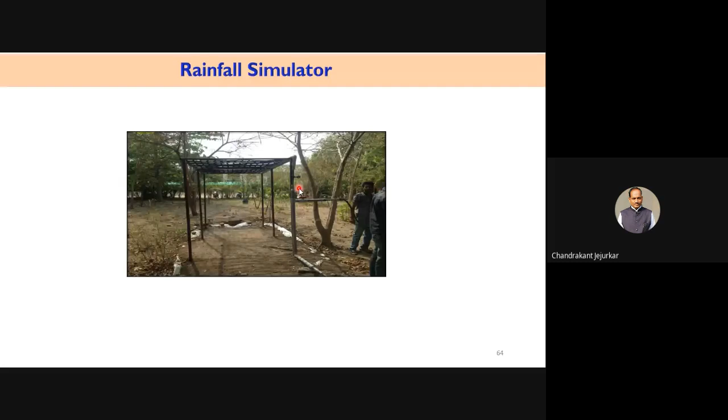This is the same rainfall simulator, a mobile type, shown here on this plot. It can be used for determination of infiltration and runoff for various studies. Here you can see artificial rain being developed with the help of this rainfall simulator.

If you observe, catch trays with plastic glasses are kept here, so with this we can find out the infiltration depth along with the depth of precipitation. At this end we can determine the runoff, collecting the water. Knowing the precipitation and the runoff, we can find out the infiltration.

We can check the same infiltration with the help of a double ring infiltrometer, and if it matches, we can conclude the results are okay. So this rainfall simulator, which is a mobile type, is also useful.

Presently I have modified it, and I am now using sprinklers with a coverage of 1 meter diameter of area for my experiment. As such, I haven't reached any conclusion till date due to different constraints, but new researchers can work on this sort of thing for their research work.

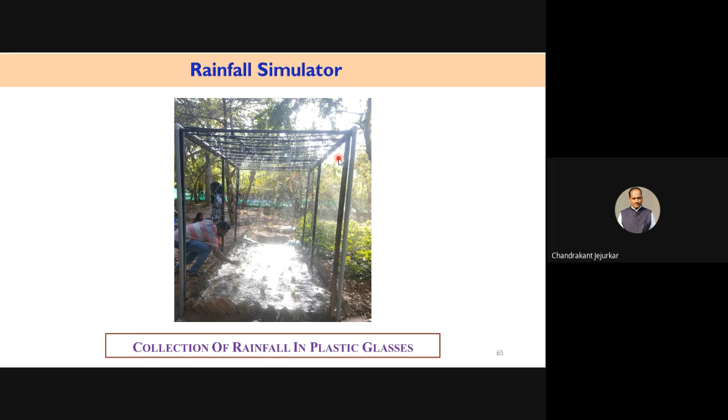A lot of observations are required, and consistency in the observations is required, because when we collect the data in water resources projects, the major constraint is collection of the data. If data is generated by oneself, one can conclude very accurately whatever results one gets.

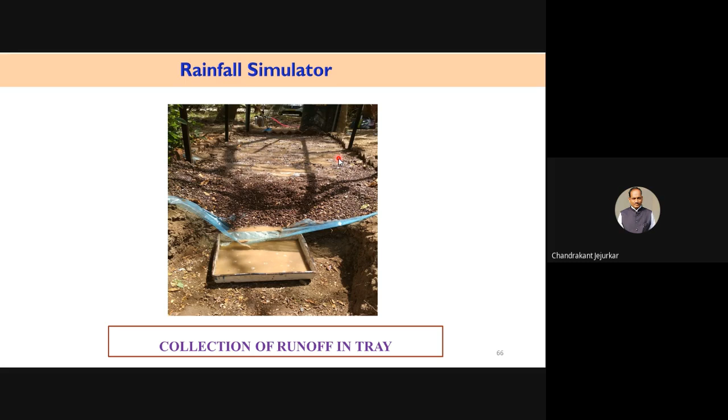So here I have tried to measure the runoff also, but till date I haven't reached any conclusion as such. My work is going on with this rainfall simulator, and in the coming time definitely I will come to a conclusion. So thank you, this is from my side.